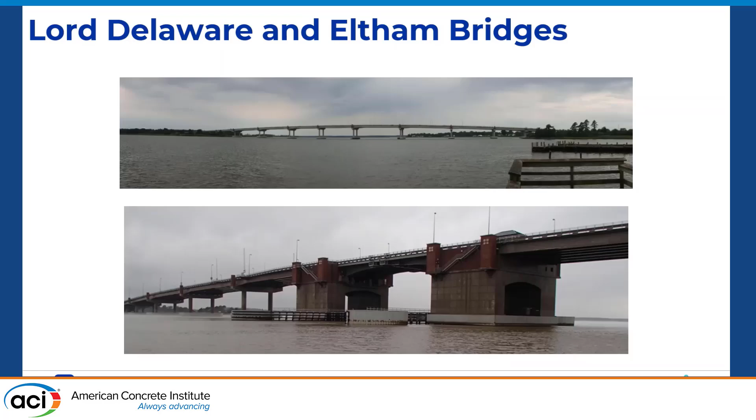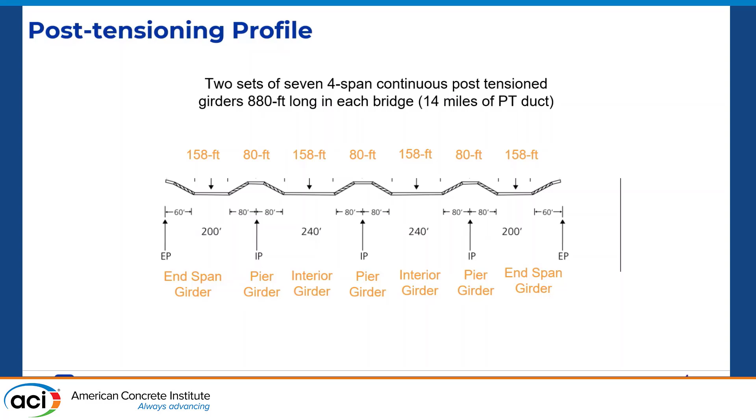Just to show the profile, the four spans are continuously post-tensioned, and you see they're totally about 880 feet, so fairly long post-tensioning there. These are the cross sections of the girders, fairly tall girders, about 8 feet tall, but in the web is about 8 inches, so a fairly slender looking structure.

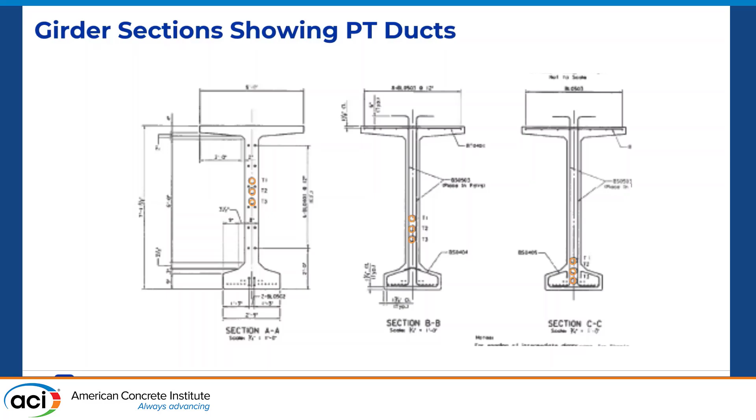This was one of the first lightweight concrete girder systems that we had in Virginia for such an application. I think the expected strength was 10,000 psi. Fairly successful application. As you can see, there are three little circles in the web. It's a thin web, 8 inches wide, but then you have ducts about 3.5 inches right in the middle, so there's not a whole lot of concrete around it. It's taking a lot of stress in there.

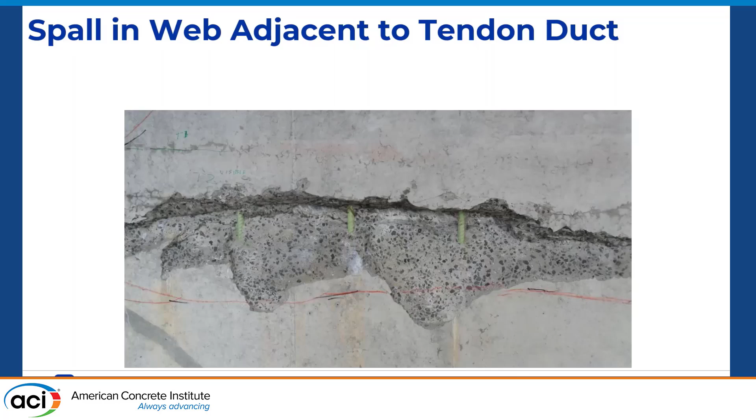In 2015, the inspectors found huge concrete spalls around these ducts, and you can almost see the duct exposed right there. This was found on the fascia girders on a few spans, and there was a huge concern about what's happening here. There were also a bunch of cracks around the web area, as well as a little bit on the flange, and you see some moisture leaking out as well from these cracks.

So the district people panicked. They contacted Michael Sprinkle because Michael has always been the expert on grout, anything grout. They wanted to know if this is related to anything that's inside the ducts.

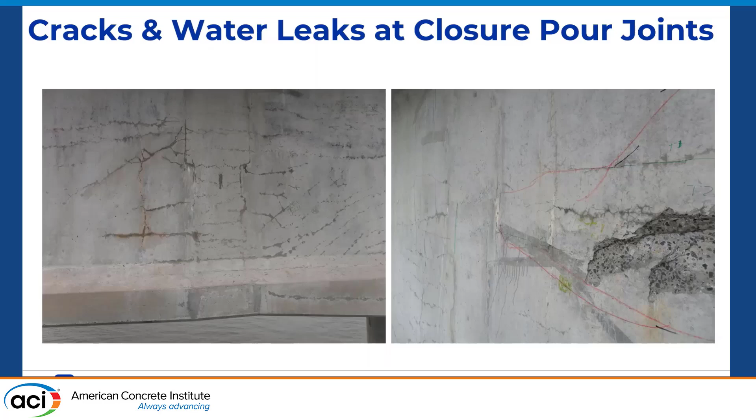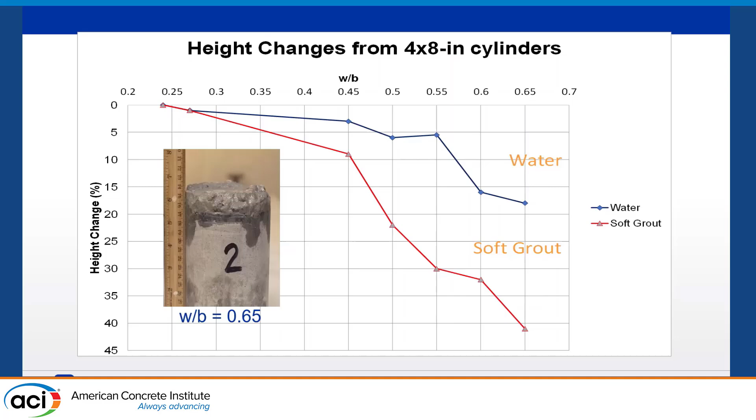So he suspected, based on his experience, that maybe that's what happened. Maybe excess water was added during construction. That was one of his hypotheses. And why did the spalling happen now, not 8 or 9 years prior?

That was a really cold winter, so he thought maybe it has to do with freeze-thaw. If there's excess moisture sitting in the ducts, maybe there was some freeze-thaw that caused the expansion of the grout, which could have pushed the web out. The web is only 8 inches wide, so not a whole lot to hold it in place.

He also thought maybe, depending upon the type of grout used in this bridge, his expectation was that the good grout basically settled down, while there's a transition layer of soft grout, moisture, and then big voids at the top. So we wanted to just check each of these.

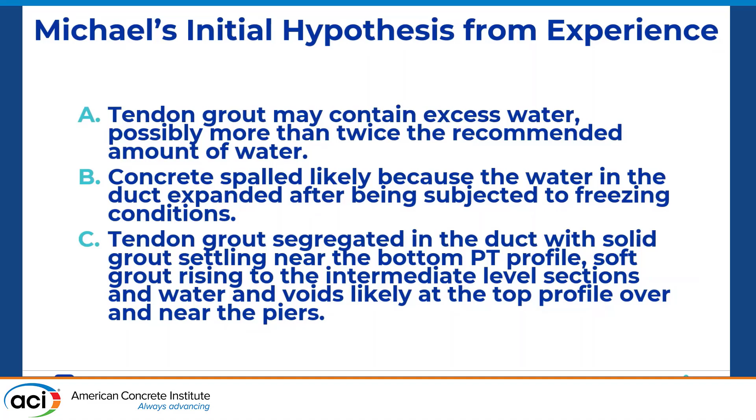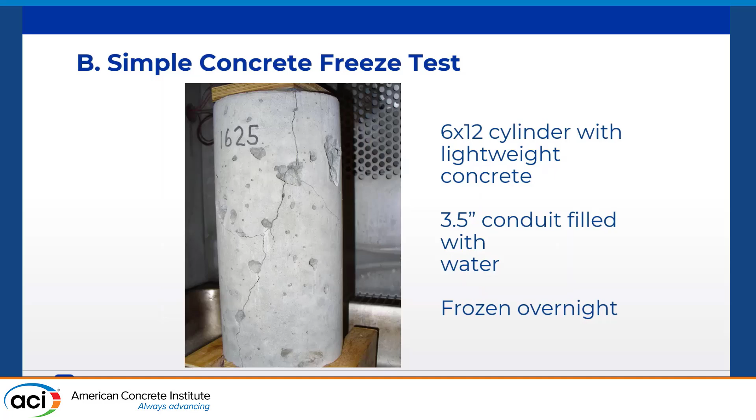He went about it, like Mike Stenko was talking about—he's all about simplicity. Just do something, don't keep thinking about it. He just took a big concrete cylinder, 6x12, with the same concrete composition, put in a 3.5-inch conduit inside with a bunch of water, and froze it overnight. It cracked up. He thought, hey, that's a problem—that's the most likely problem. So we went ahead and planned a fairly large field study.

I only had about 3 years at the council back then, so I was basically his grad student. He took me along, and this was one of the best experiences I've ever had.

This is a fairly tall bridge, with a huge water body below. There's a paper mill right in the middle of these two bridges, so there are lumber trucks all the time, 24 hours a day. On a bucket truck you feel every time a timber truck goes by. These spans are 240 feet each, so the displacement was as much as a steel structure—it's fairly flexible. So we looked at a bunch of cross sections.

I was just learning some non-destructive testing, and that's when I had a chance to implement some of those learnings. We looked at 54 cross sections on one bridge and about 26 on another. This was on all girders, and then here just the fascia girder.

He decided to open up a few spots, because just having the NDE wouldn't be enough unless we could compare it to ground truth. So we opened up 41 plus locations and looked at all kinds of composition—was there chloride, was there sulfate, what was the pH—because if excess water was added, the gypsum would have segregated, showing up as sulfates, with maybe some change in pH as well.

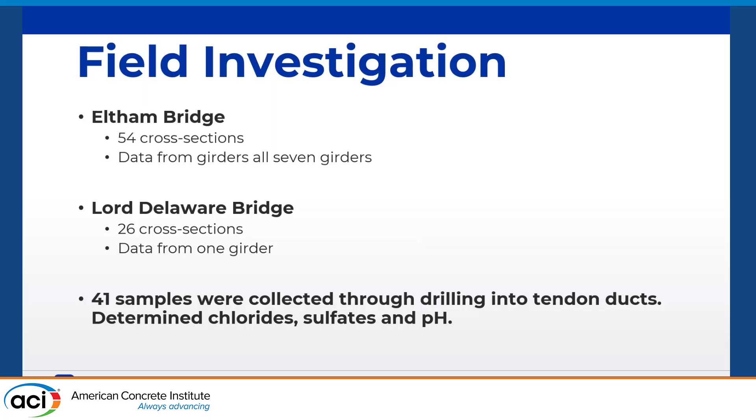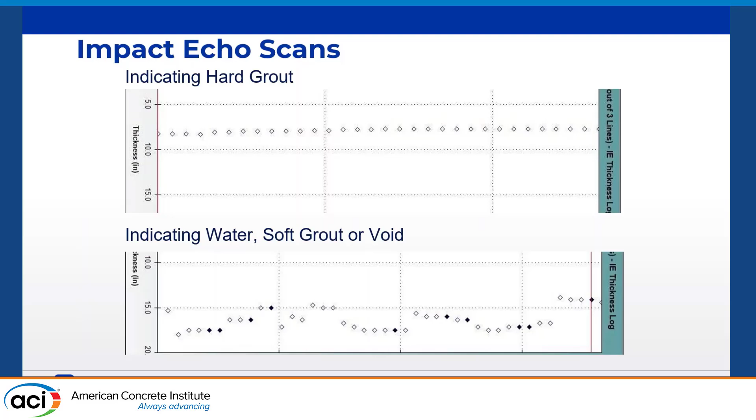We looked at impact echo, and multiple other technologies, and that was the one that worked out well in a small mock-up we tried in the lab. He really likes to prepare, to be ready for field work, because every minute we spend in the field costs money—there's traffic control on lanes, renting of special equipment—so he wanted to make sure we used that time wisely.

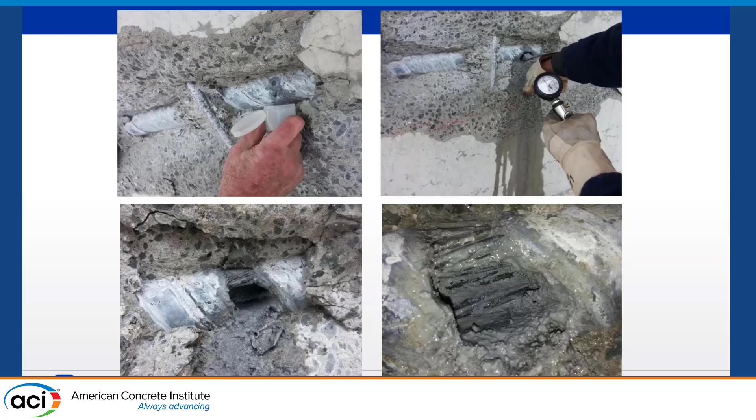So on one of the next runs of this field work, he brought an air compressor and pushed all the concrete out. I'd like to show you this—let me see if I can run the video. This is before... wait a minute... this is after the air compression.

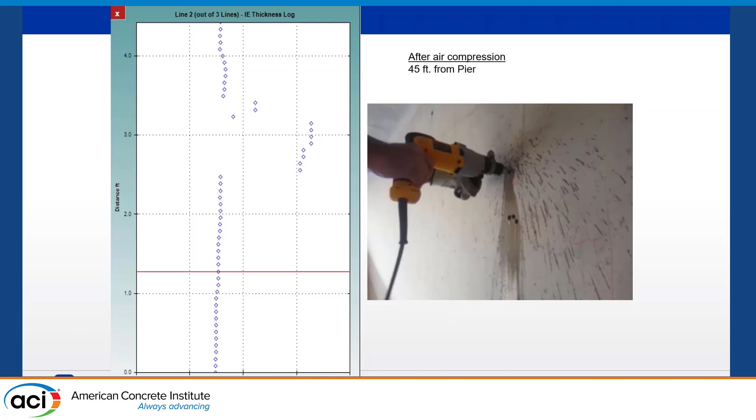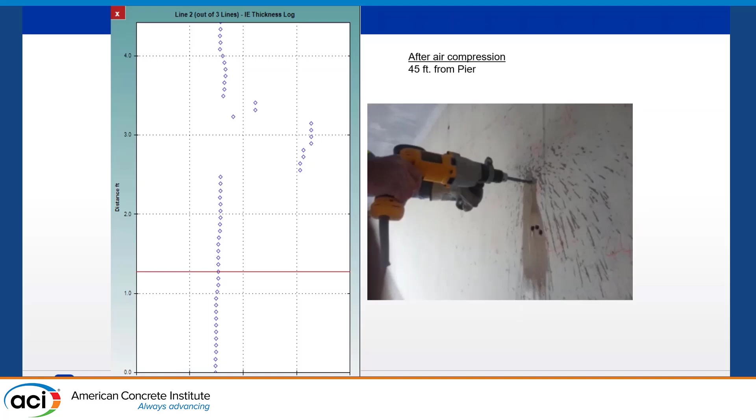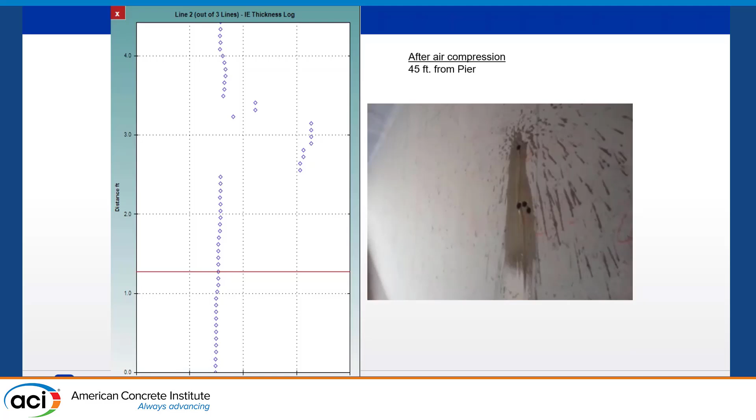That's Michael Sprinkel drilling into the post-tension duct on the bridge. See the water gushing out? We must have found gallons and gallons of water. We were totally unprepared for such a large amount of water in there. But in the next girder we poked into, we were able to get a bunch of samples from the water—you can see water still coming out, it's not done.

This is girder 3, pier 34, span II—that's me recording the ID of the location we drilled up there. Yep, that was Michael's voice, by the way. That's why I left the video running.

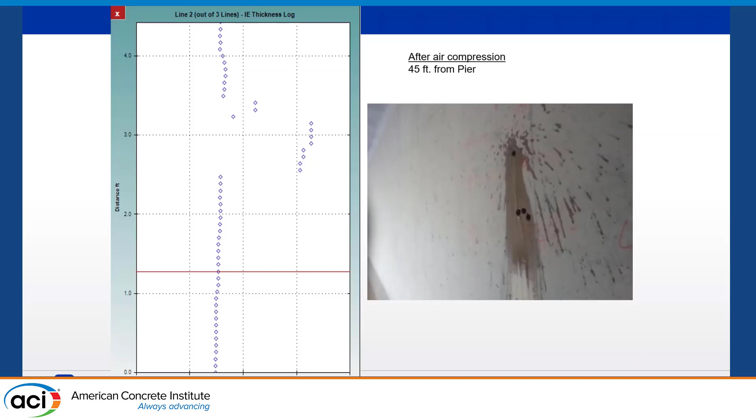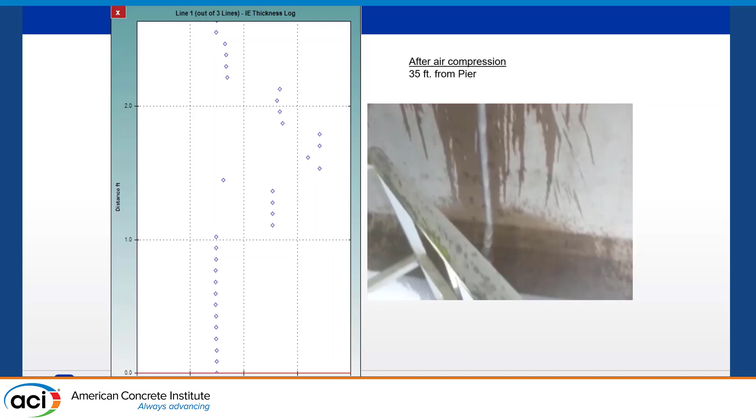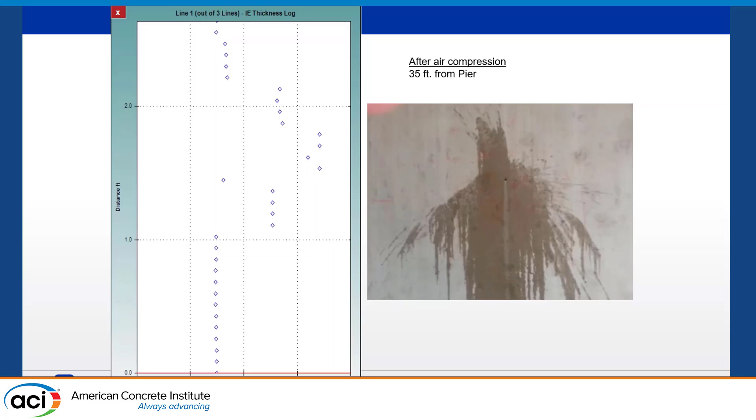Here's another ridiculous amount of water gushing out—that's like a pipe. That's from a nearly 10-year-old structure. As you see, this is only about 35 feet from the pier, so the duct is kind of going out, and you have all the water just there. We found the most critical part, and the water was such that we could have filled a 5-gallon bucket at each spot. That's his glasses, by the way.

Some interesting observations: even the interior girders had a ton of water in them, even though they looked pristine—no cracks, nothing at all. But the NDE allowed us to see what was happening in there. We realized the temperature difference on the outside girders is much different from what the interior bay girders experience. They're not going through the ups and downs as much as the exterior ones, so they didn't crack as much, even though there was as much water as the outside girders. One of the things that stumped us was that one of the bridges was quite predictable, like the solid grout at the bottom.

There's a transition layer, and then a void at the top. But then the other bridge stumped us too, because we found some void at the bottom in some areas, and then some solid grout at the top. So they must have really pushed that concrete grout through while it was setting.

He also wanted to make sure water didn't come in after the construction, so we set up ponding on top of the deck at the location of cracks. It was dyed with red dye, and then we used an air compressor to try to pull in that moisture, and we were not able to see anything. So the conclusion was all the water in there was from the time of construction. Nothing had come in after that. That was kind of a relief.

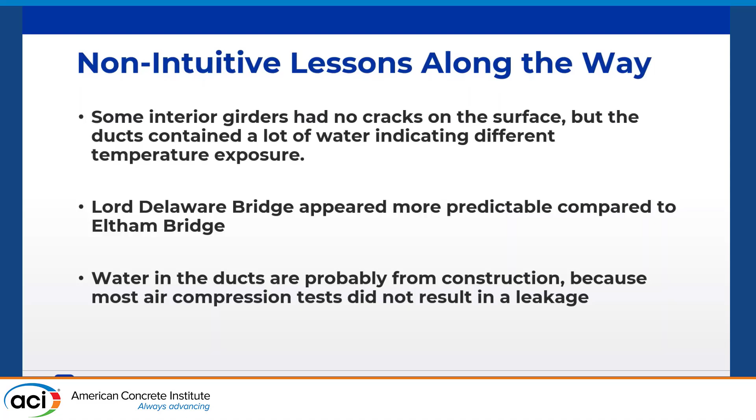Right now, plenty of work is ongoing. One of the issues we found was, even though the NDE was hugely helpful, he wanted to make sure we had multiple options in terms of technologies, because all technologies have some pros and cons, and it's easy to miss stuff, especially with so many cracks on the surface. The impact echo we used did not help to look inside, it would scatter the waves and wouldn't really see inside.

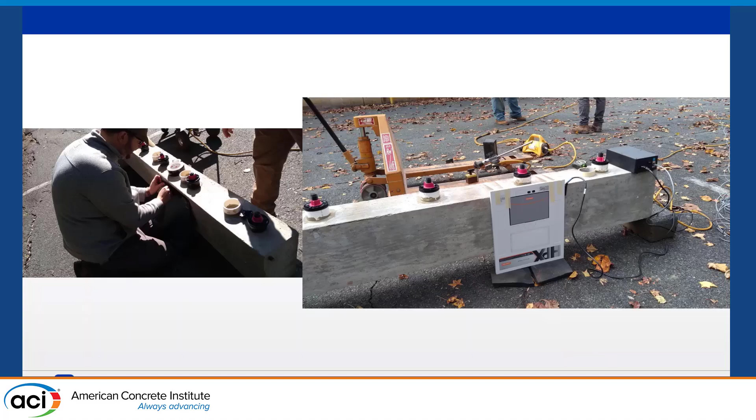So that was him finding digital gamma ray radiography, basically a medical device. He made some mock-up specimens and put in different types of defects inside the ducts, and used this digital plate to record the readings. This was some of the best readings we ever had with NDE, even though it's quite expensive, at least back then, and it's close to how it actually looks inside.

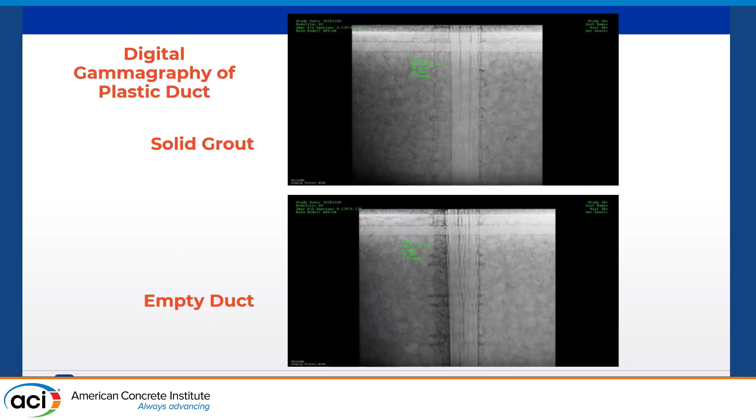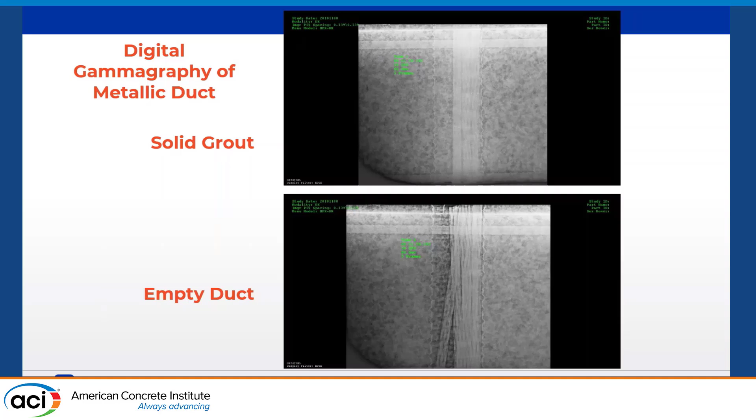What you see is a representation of density. The darker something is, the less dense it is, and the brighter something is, the opposite. So you see the strands, you see the void at the bottom. This is the plastic duct, this is a metal duct - no difference, you even see the corrugations of the metal duct. It was the most impressive technology we used back then.

And this is another one of his ideas, to use mock-ups on all these exploratory technologies. He wanted to make sure absolutely that something would work in the field, because time in the field is money, as I said before.

So that is an external tendon, what Chelik had shown before on a signature structure. He made a mock-up of it with a bunch of defects placed inside, and then that's the consultant running a magnetic flux leakage on it to find out all the problems.

One of the main takeaways is the amount of preparation, the importance he placed on it before heading out. As you can tell, it's a triple blinded nature - nobody knows what's in there. The owner doesn't know, the consultant doesn't know, we have no idea what to check this against. So we need some limited ground truth, that's all we can look for.

And there were two other instances where some of the NDE methods did not come through. We've only found about 60% match with the ground truth, even though a vast amount of data was collected. Another investigation only found about 50% match. And for magnetic flux, one consultant had 100% match, and another only found 60% on the same exact mock-up.

But he did not want to give up on the same theme. He made sure we would accept people who can qualify based on the success of their demonstration, not based on a technology. He didn't want to say no to a technology, he just wanted to say no to someone who did not pass the test. That's what VDOT has been using ever since. It's not just NDE, structural monitoring has the same approach. That was all his idea.

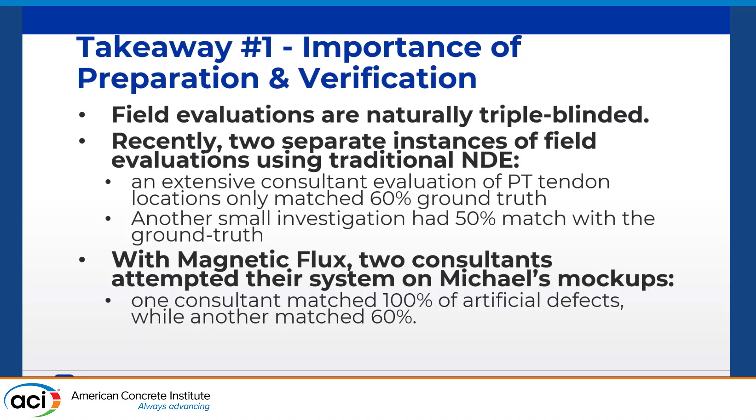In takeaway two, there was common sense over anything and everything. No amount of AI or machine learning can compensate for the lack of common sense. He really believed that. And do no harm - he did not want to poke holes into bridges unless absolutely necessary. He didn't want to introduce any new harm to the bridges. That's why he was a big proponent of non-destructive testing and structural monitoring, and he never really gave up on them.

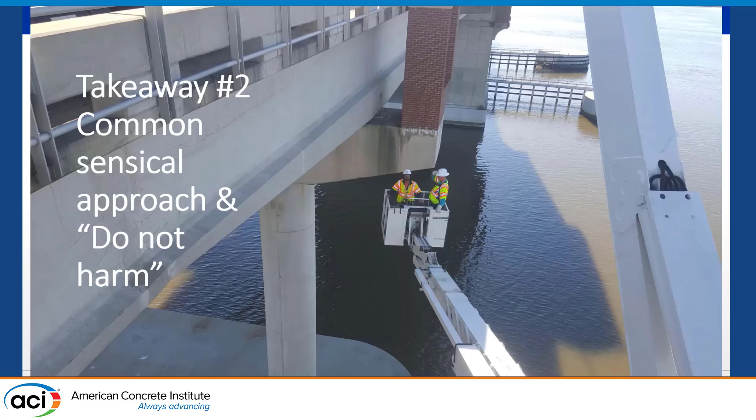And the final takeaway, learning by doing. I mean, that's him - he had over 40 years of experience by then. I'm the one taking the picture, I had 3 years of experience. He wouldn't let me drill that thing. He wanted to make sure that was done right, because that was the first time we were attempting something. He had an army of technicians, he could have had anybody help him out, but he wanted to learn by doing, and that's the biggest takeaway for me.

So it's been an honor working with him and learning from him, and we'll always miss him. Thank you.